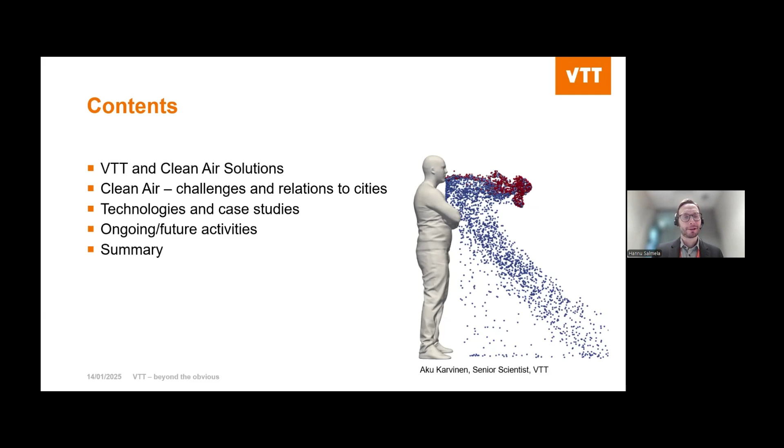My title today is about novel clean air technologies and indoor air interventions utilizing these techs. The content shortly: I will introduce very shortly about VTT and our team Clean Air Solutions, then some challenges relating to clean air in smart cities. The main part of my presentation is about the technologies and case studies utilizing those techs, and a few ongoing future activities that we have at the moment. To put it in a nutshell, the idea is to highlight existing airborne contamination control technologies and present some scientific background, but also practical applicability of those novel technologies.

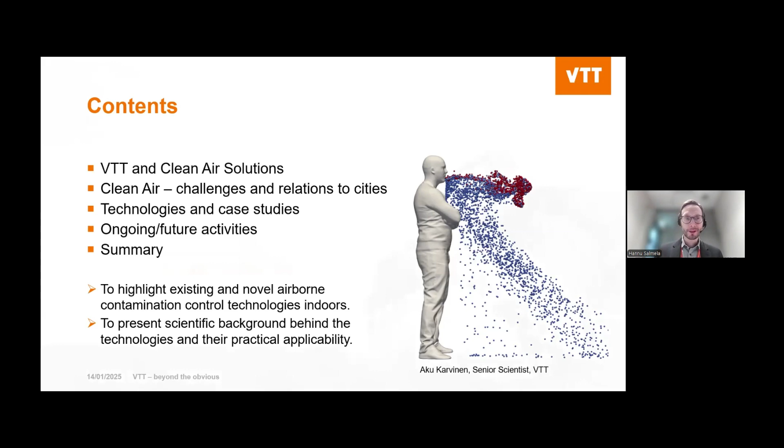VTT is one of the leading research and technology organizations in Europe. We focus on applied research and global problems like carbon neutrality, sustainability, resource scarcity, and digital technologies, with over 2,300 employees. We have served lately over 1,000 customers, and our operating income is roughly 300 million euros. Our brand slogan is Beyond the Obvious, and that's how we usually try to think about different challenges, to be one step ahead.

Our clean air solutions - I'll show our laboratory premises. We focus on basically two areas: healthy air for people, like we are discussing today, and other branches about industrial ventilation and industrial filtering. We also have some niche areas relating to decontamination, but the main thing is airborne contamination control in various forms. The methodology we use is experimental. We have nice laboratories in a city called Tampere in Finland, with two measurement rooms for air purifiers and ventilation studies, and two special test rigs for general ventilation filter and also industrial filter research and development work.

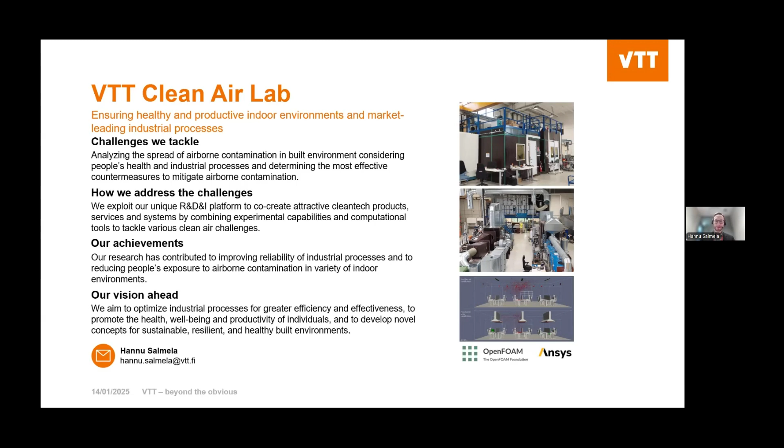To introduce very shortly about today's context - we had already two introductions, so I'm not putting too much on this. Of course we know air pollution is a global problem, outdoors and indoors, and the latest guidelines, for instance from WHO, also highlight the importance of indoor air pollution. That's very important, and they have also highlighted emerging pollutants like ultrafine particles and black carbon.

Pandemic and airborne transmission - like in the introduction, we were very heavily involved at the national but also EU level on pandemic, especially airborne transmission of COVID. We had background already from SARS-CoV-1 times, also coordinating an EU project at that time.

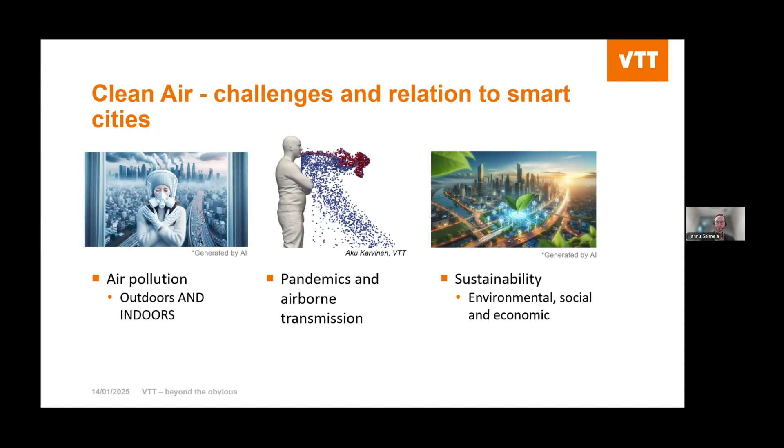But the third challenge is how to make this sustainably, how to make this enhancement in an environmentally sound way, how to make it economically feasible. And what I would like to stress here is how to make it in a socially just way globally. So, of course, the aim is a healthier, more resilient city, and here are the tools that we typically have in our hands.

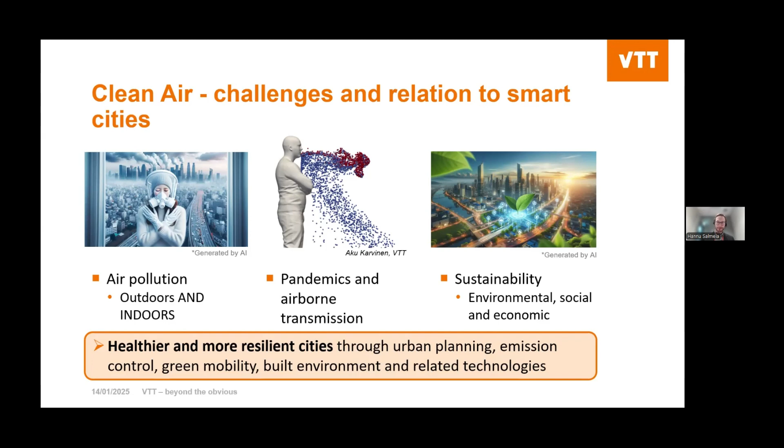Moving to the technologies, of course ventilation is a key issue. Here is a well-known picture about flexible ventilation systems - the left top about designing for maximum occupancy, so typically mixing ventilation, and what is the maximum occupancy in a room, designing the ventilation accordingly.

But of course we have in some cases demand-controlled ventilation, especially in places where occupancy is changing heavily. We have improved air distribution, and that way we can direct the clean air to the places where it is most needed. The same applies also to personalized ventilation, so in that sense we can direct the air very efficiently to the place where it's needed.

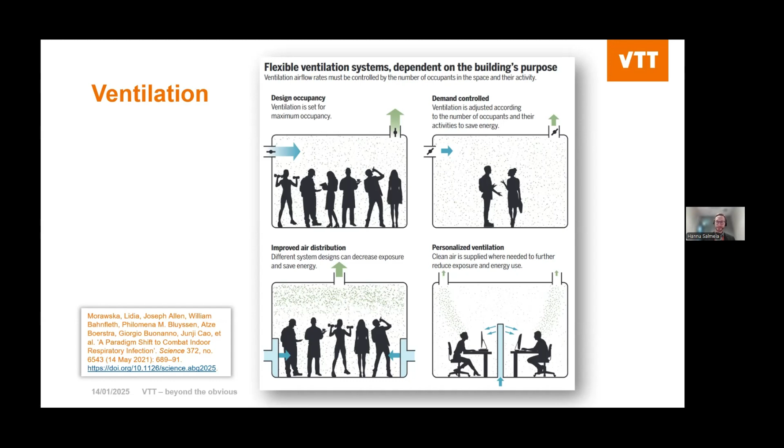But of course it's kind of a challenge in terms of flexibility. And these are more about mechanical ventilation in buildings, but we need to remember that naturally ventilated buildings are globally a big share. Then about air cleaning, here is a kind of list of the technologies typically utilized in air cleaning.

We have focused on the three first ones: mechanical filtration, electric filtration, and adsorption in air cleaners, mostly on particles, and of course with active carbon solutions for gases as well. We also have background in UV and optical radiation, and at the moment we are mostly interested in far UVC and its applicability.

The most important thing about air cleaners is its clean air delivery rate - how much airflow goes through the device multiplied by the filtration efficiency of the cleaner. The pictures show that the cleaners may not always be standing on the floor, but also integrated to a ventilation system or may include some ductwork as well.

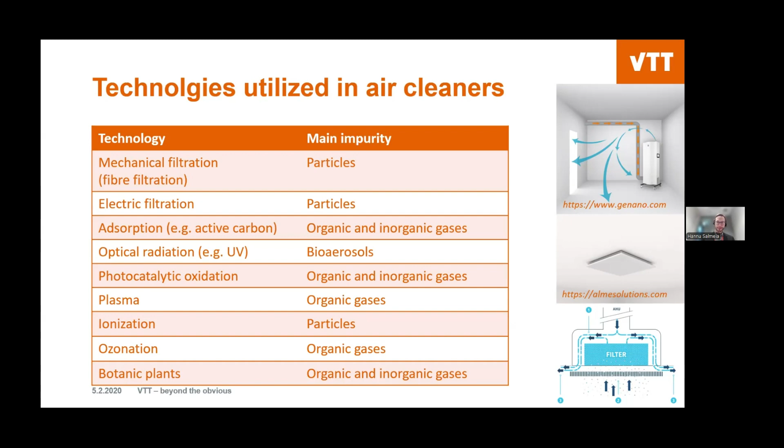This slide is just to remind us that, especially about fiber filters, filtration efficiency is very much to do with the particle size, and the most difficult size range is a couple of 100 nanometers. You can, of course, enhance the mechanical filtration with electric forces to some extent.

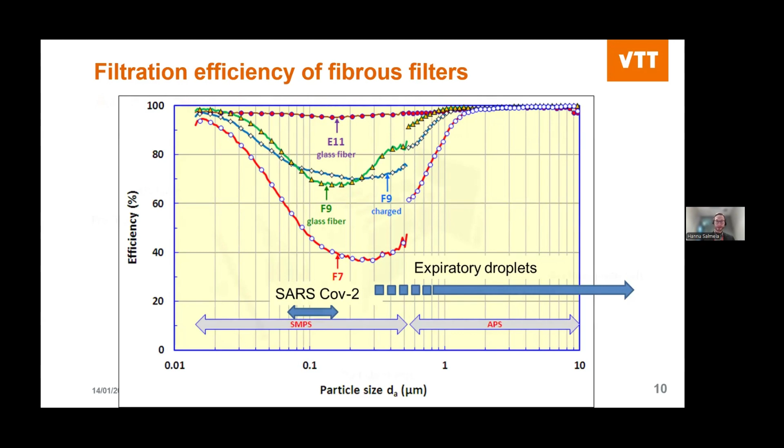Here is an example of a combination technology that we developed some years ago with a Finnish company. It's called 3G filter. The idea is to have a particle filter combined with gas filter and also UV for microbial inactivation. I think this solution is starting to sound like 6G nowadays - there are additional phases also incorporated, like more enhanced gas filtration if that is needed in some surroundings.

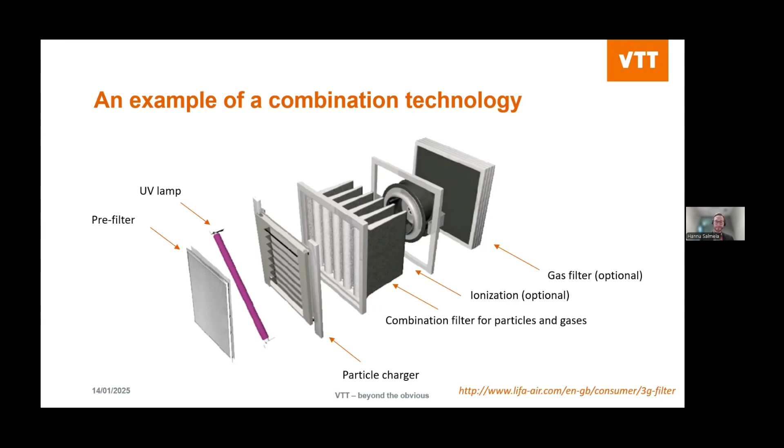If you combine that kind of very efficient supply air filtration with room air filtration, here is an example of a concept that utilizes a so-called clean air diffuser in a room. With that kind of combination, you can reduce up to 90% particle concentration indoors compared to an existing mechanical ventilation system.

The basic idea in this clean air diffuser, which is typically used for cooling in Nordic countries and sometimes for heating purposes, is to utilize the secondary airstream from the indoor air that has been induced by the primary supply air from the air handling unit, through the device with very low pressure drop filtration. With that, you can basically have a ventilation terminal unit and an air purifier in the same package.

That's just to showcase the graph that you can reduce, for instance, probability of infection. This is calculated from the Wells-Riley model, up to let's say 1/5. This has also been commercialized by one Finnish company nowadays.

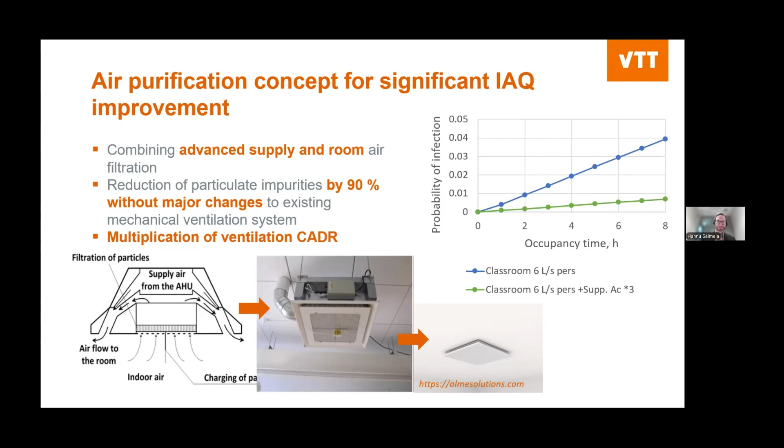Okay, moving to the case studies. Here is an example of utilizing air purifiers in daycare centers. It reflects a big pandemic response project in Finland. We were curious to showcase how much air purification, in addition to an already good level of ventilation, can make a difference.

So we had 2 daycare centers with air purifiers and two daycare centers without, for the first year, and then we changed the purifiers to the other daycare centers. It kind of was a crossover study for 2 years, and the result was interesting - we could reduce the incidence of illness among the daycare children by 18% by increasing the clean air with air purifiers. I think these are very good results of practical research.

This was our thought that it will help, but now it has been also showcased in a scientific manner, with medical doctors taking care of the sampling. Of course, this has a potential for saving on illnesses of children and also for their parents that typically are absent during child's leave.

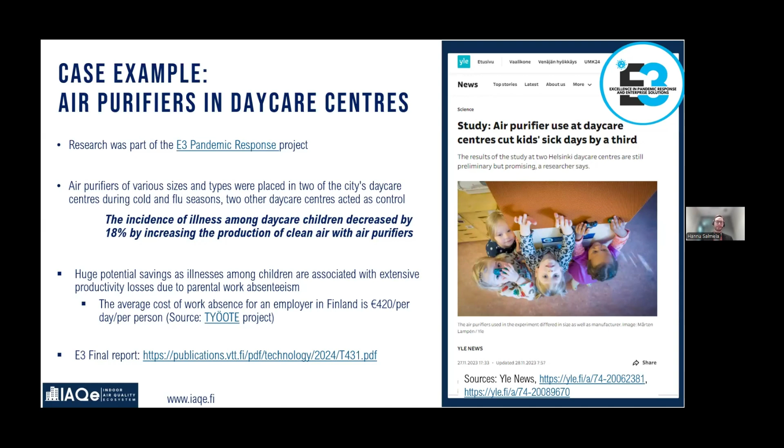Going a bit deeper into this case, one important issue here was that we utilized risk-based sizing of air cleaners. Of course, we would have liked to have had more cleaners, but there was a limited amount, so we needed to carefully think where we should install those.

What we did is to evaluate the existing ventilation, see the drawbacks there, and have a usage profile for the spaces where there are most people at certain times. We then used certain weighting factors that were calculated for each space, and for the risk or infection probability assessment, we utilized our own tool that was developed in this project.

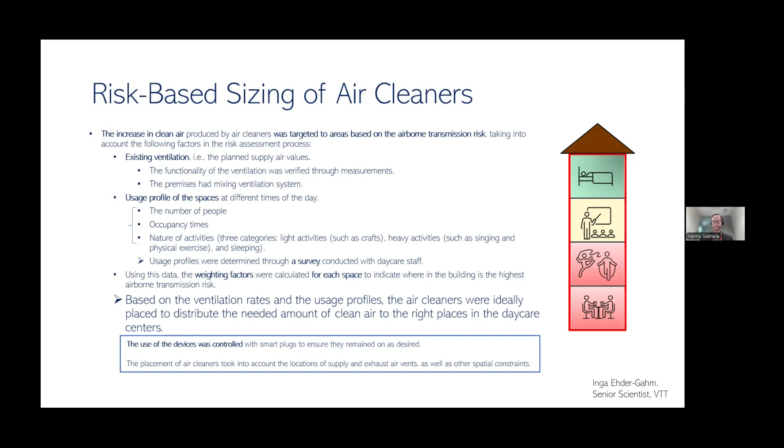Based on this knowledge, we were able to ideally place the clean air purifiers where it was mostly needed, and it looked like this in one of the daycare centers. You can see with the red color that certain places, like dressing rooms and dining rooms, and to a certain extent also group rooms and the multipurpose hall, were the most urgent places to place air purifiers.

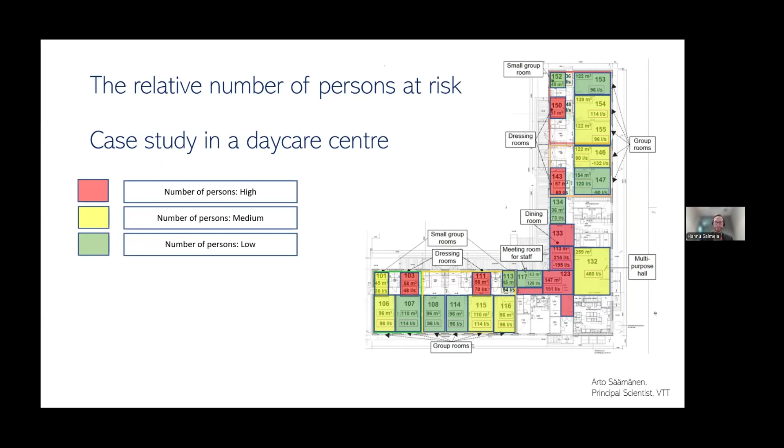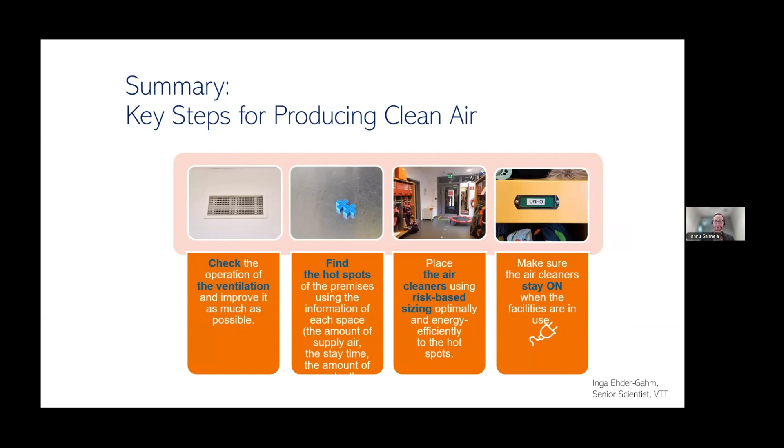So to conclude, key steps from this study were: check the ventilation, find the hotspots, place the air cleaners utilizing this risk-based sizing method. And perhaps fourthly, but not least, make sure the air cleaners stay on, because those little hands were all over the place in this case, so we utilized electric meters to check that the air cleaners were actually on.

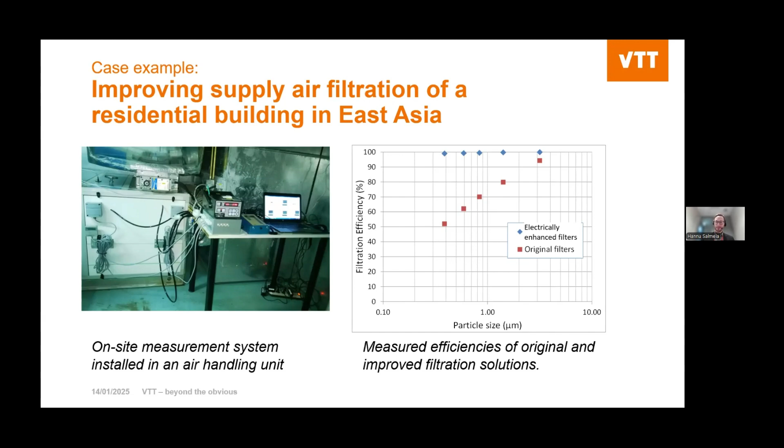So there's a notable enhancement in the filtration, basically utilizing the same components in an air handling unit, with a filter solution that had lower pressure drop compared to the original one. We utilize this Lifa Air 3G system, an electrically enhanced filter with a wire charger assembly. And of course, we need to take care of the ozone production that the wire charger may cause, so the filter is equipped with gas filtration media as well. Due to the continuous charge, it also keeps the filtration level very good. We have experience that with 1 year plus case studies, it degrades only to, let's say, F9 or F8 grade - so much better filtration efficiency with lower pressure.

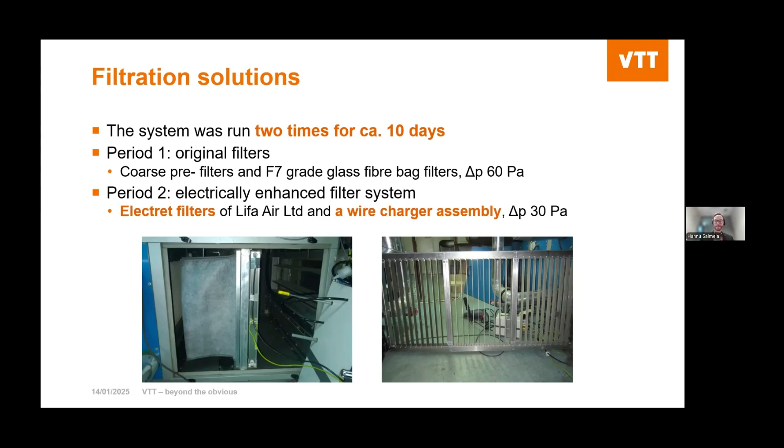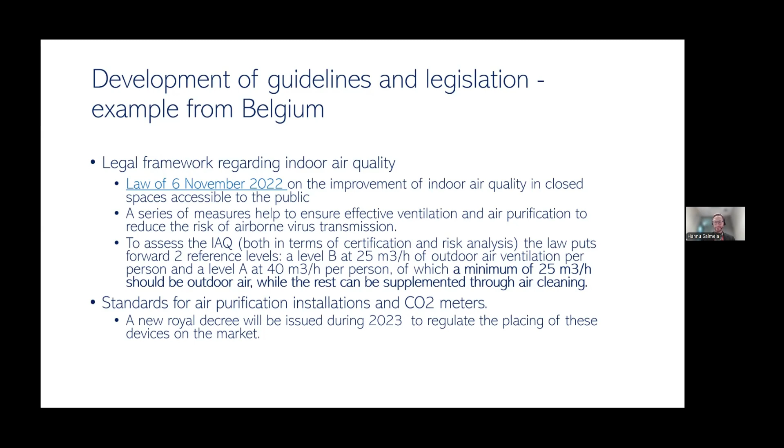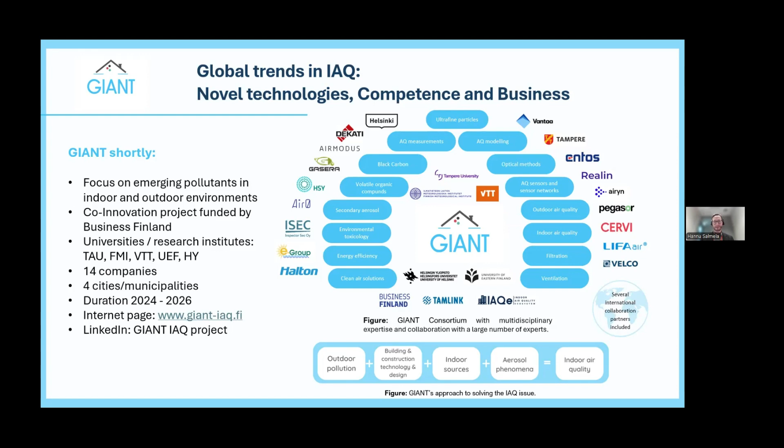Another project relates to ultrafine particles and black carbon especially - an ongoing project where we focus on these emerging pollutants. In Finland we have very good monitoring companies, and the idea here is to leverage this kind of city-level monitoring indoors in a cost efficient way. Our task here is about the countermeasures, so of course we focus on air filtration, but also to understand more about how the building envelope acts in terms of ultrafine particles and black carbon. And the third one, perhaps my favorite, is the costs and benefits of utilizing this kind of solution.

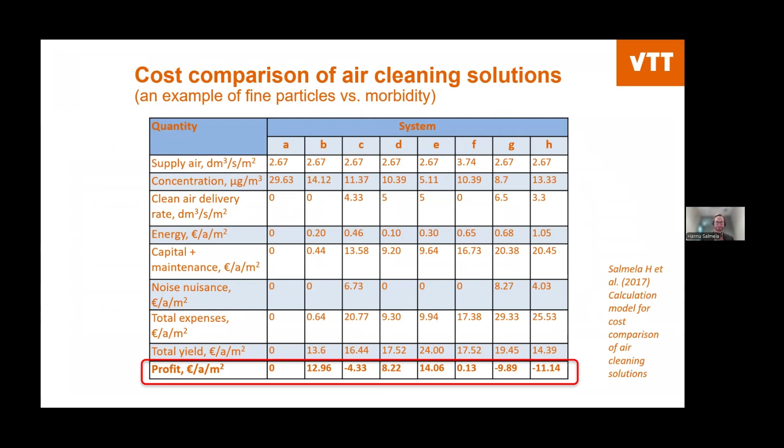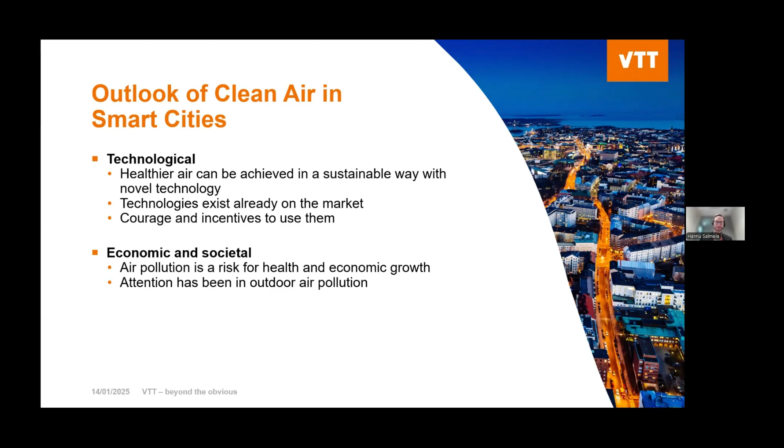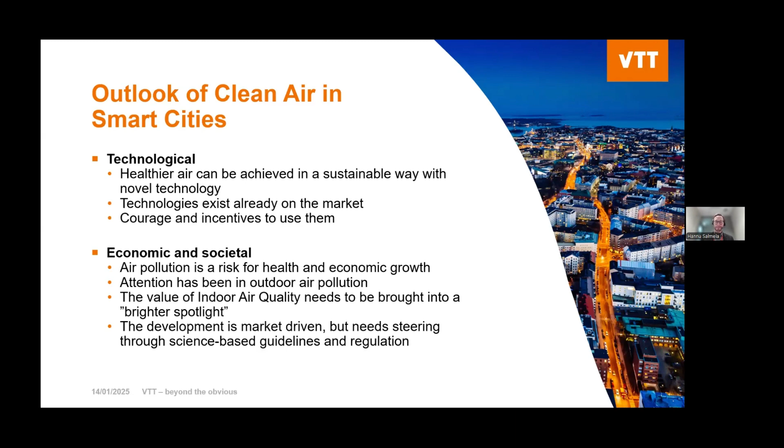From the economical and societal view, I think we all understand that air pollution is a risk for health and economic growth. Attention has been more on outdoor air pollution, so I see it as very important how the value of indoor air quality can be brought more to the spotlight, like with this kind of campaigns and projects that we have here. I believe that the development is market-driven, but still needs steering through science-based guidelines and regulation. Perhaps to leave you with a question: how can we make that happen in the most just way globally, in those places that require better air quality the most. Thank you.